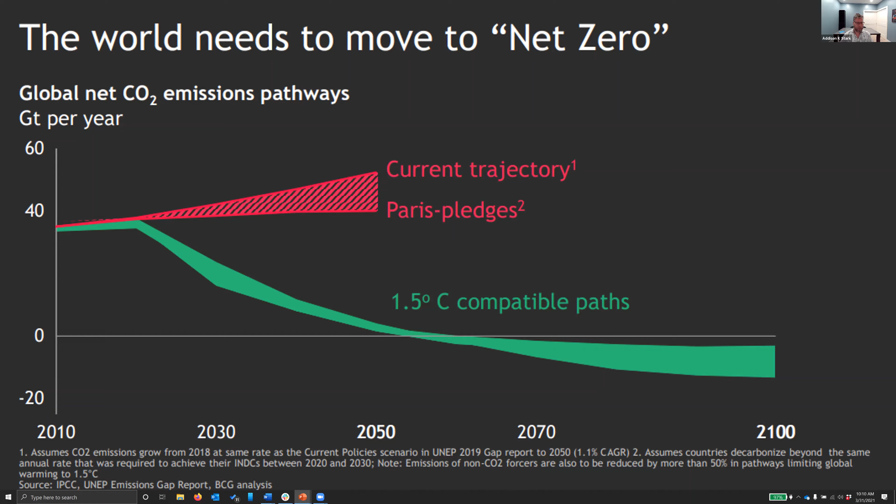But one of the important pieces is the fact that all the sectors not only need to be able to get to net zero, but eventually go to net negative. So that means a broad innovation agenda to be able to develop the technologies we need across all emitting sectors. And today, if you look across where are emissions coming from, you can track them to primary energy consumption.

So if you look at this classic Sankey diagram, which I'm assuming every week this has come up during this seminar series, things are kind of equally spread across electricity generation for residential, commercial, and industrial use, but also, as you notice, a huge amount of fossil energy between petroleum, natural gas, and coal is used directly in industry. Some of that's used as feedstock to be able to make materials, but the vast majority of it is used to directly produce heat to drive processes.

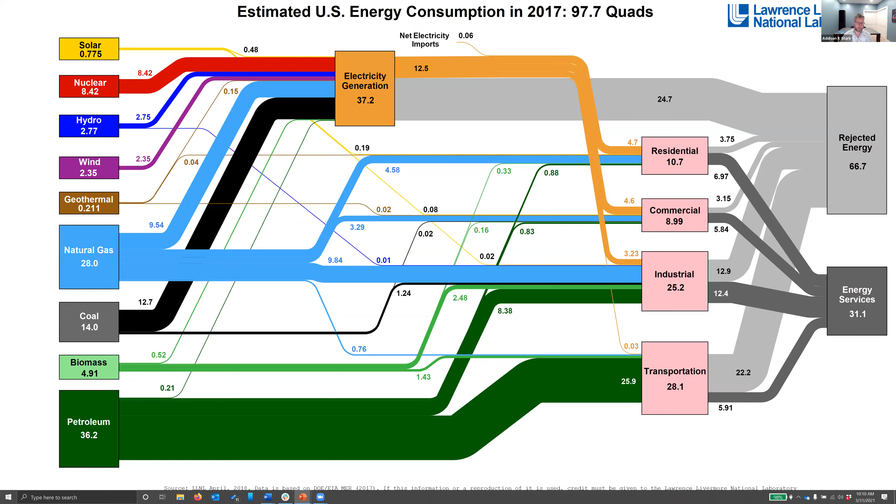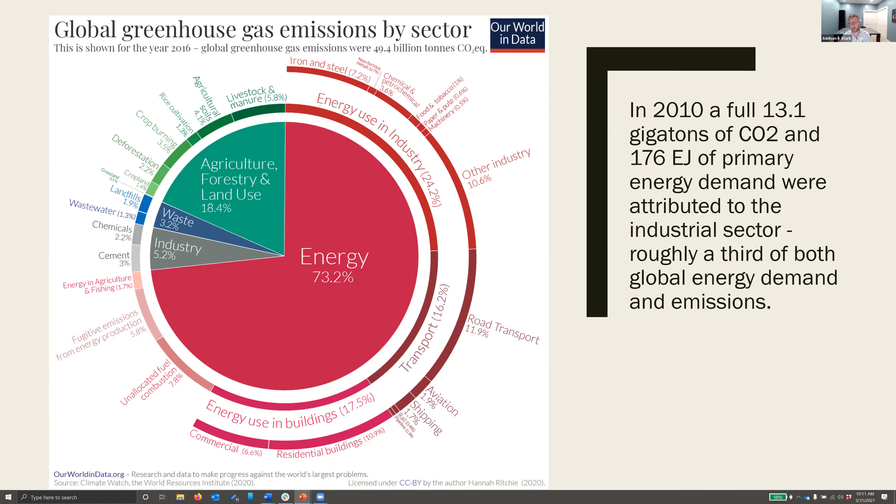When you drill down a little bit, you can see that in 2010, a full 13.1 gigatons of CO2 and 176 exajoules of primary energy demand were attributed to the industrial sector, which is roughly a third of energy use and an equivalent amount of CO2 emissions. If you want to think about how we actually try to decarbonize that sector, it becomes harder much more quickly.

If you take a more detailed view of this, and actually it looks like my toolbar might be blocking this, I apologize, but this is from a great website called departmentof.energy, where you can actually drill down and look at each of the individual parts of the industrial sector.

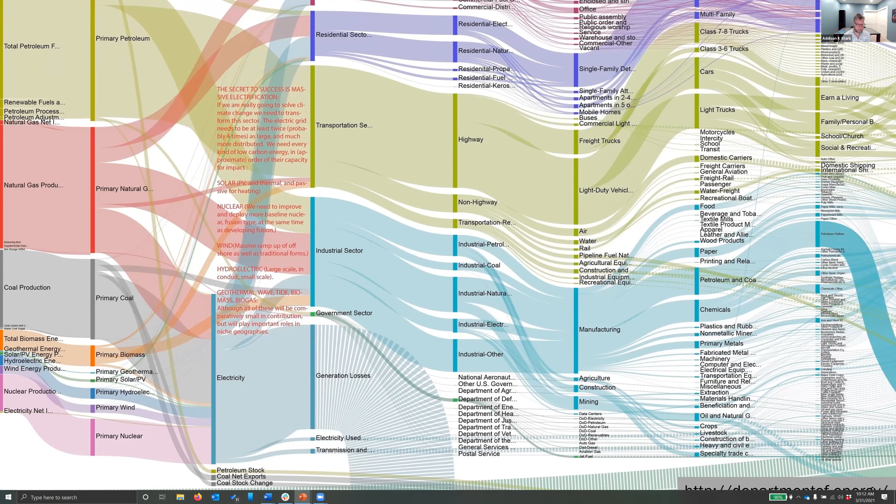You'll see that actually to decarbonize the industrial sector means you need to start to address hundreds, if not thousands, of individual processes. So innovating and developing, for example, a new process to smelt nickel would be very expensive. And can you port over knowledge you learn from decarbonizing other technologies? We run into the challenge that industry is a collection of very inhomogeneous processes. So how do we find unifying opportunities to start to decarbonize this sector?

One thing we need to recognize is that some of these industrial emissions are inherent to their process chemistry. So if you look at the production of cement and steel, the materials that build our world around us, each of these do have process heat associated with them, but they also have direct emissions of CO2 from their process chemistry. This is something that Fon talks about a lot in his work and focuses on how do we think about re-innovating these processes to make them more decarbonized in their process chemistry itself.

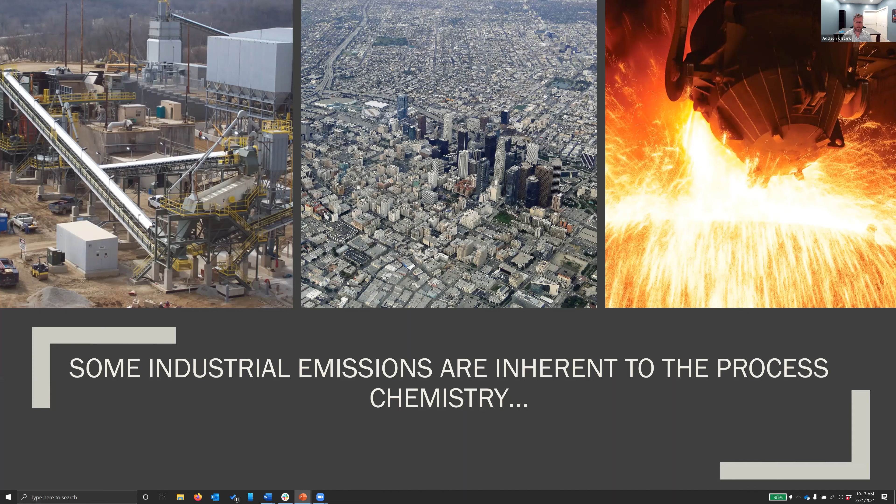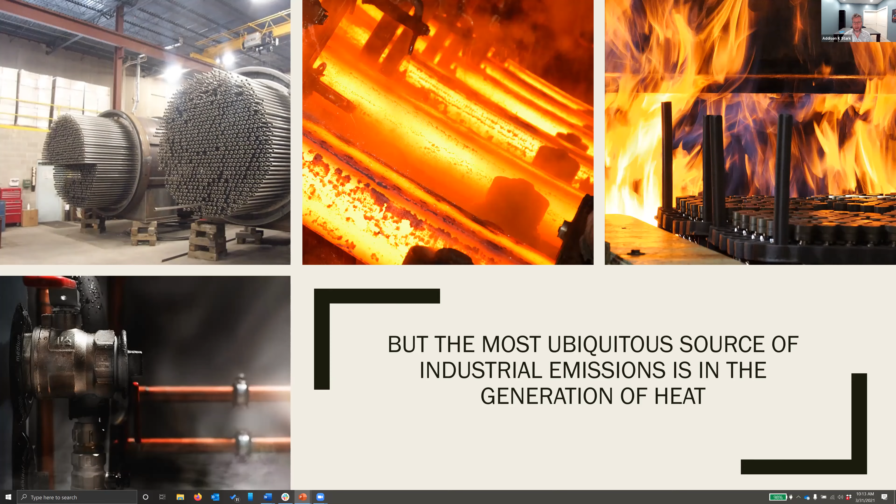However, the most ubiquitous source of industrial emissions across all the different processes that we see in industry today is through the generation of heat, whether it be through steam to drive machines or to do process conversions to drive chemistry. You can imagine steam being used for disinfecting or cooking in food processing, or the very high temperatures necessary to process metals, or furnaces to drive other material processes. So it's a burning problem.

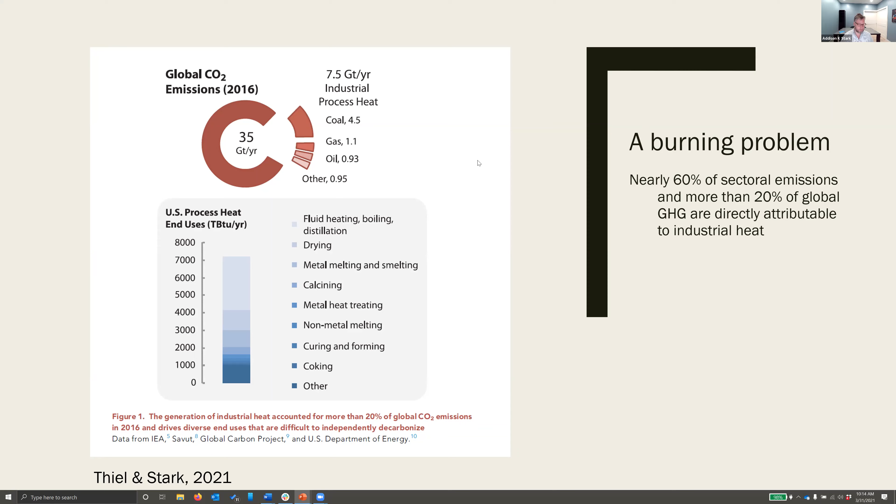Nearly 60% of industrial sectoral emissions, and more than 20% of global greenhouse gas are directly attributable to industrial heat, which means this is a huge challenge, but also it's a huge opportunity. You can go after 1/5 of global emissions by thinking about how you decarbonize the heat used in industry. And as we noticed before, most of these are driven by fossil fuels that are directly combusted to drive these industrial processes. But there's not a one-size-fits-all solution.

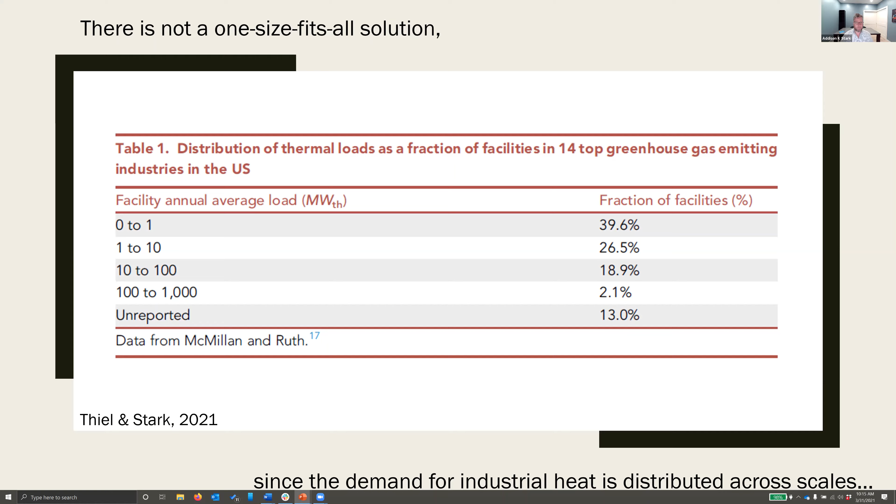And it's not the same as the challenge of decarbonizing electricity, where you're talking about very large 1,000 megawatt loads that you're replacing and decarbonizing. You have a much more distributed challenge. But also it's distributed across temperature scales.

In industry, the demand for heat spans from low and mid and high pressure steam that brings you up to about 250 C. But then you have very high temperature demands up in excess of 1,000 Celsius to be able to drive metallurgical processes, chemical processes. And so you have this challenge of we need to be able to develop technologies across scales and temperatures. And so this is the challenge that we need to bridge.

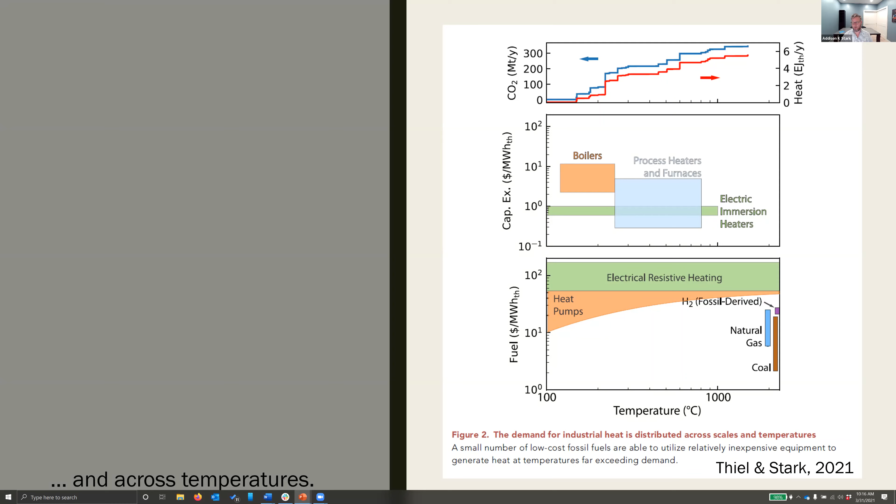And we need to not only develop the technologies, but we need to deploy them. And that's the important question of how we design our policies to be able to drive and address this challenge.

The way that we framed things up in our recent paper was focusing on breaking down and thinking about how you leverage existing approaches, and thinking about how do you actually decarbonize this is focusing on zero carbon fuels, zero carbon heat like solar thermal, geothermal, or leveraging the fact that the electric sector is decarbonizing in parallel. So as that decarbonizes, how much of industrial heat can we electrify?

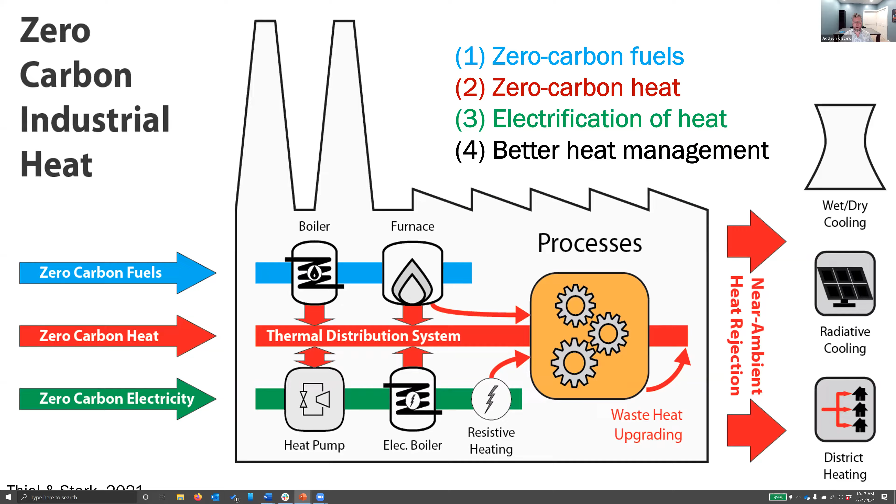This has traditionally been a gap that has been more and more addressed by the development of policy solutions by creating applied research organizations that are generally federally funded. This is an area where often we run into a challenge of also being able to transition to bringing it to the private sector. So being able to support private sector companies to take on risks in this area, but also later stage challenges.

Obviously, you should turn to Asegun Henry's paper that was the subject of the first of these colloquia series a year ago, thinking about the broader innovation challenges. But for those that are interested in thinking about how we actually develop policies to be able to deploy decarbonization in global industry, I'd recommend people take a look at this. So this balances the technology opportunities, but also the policies.

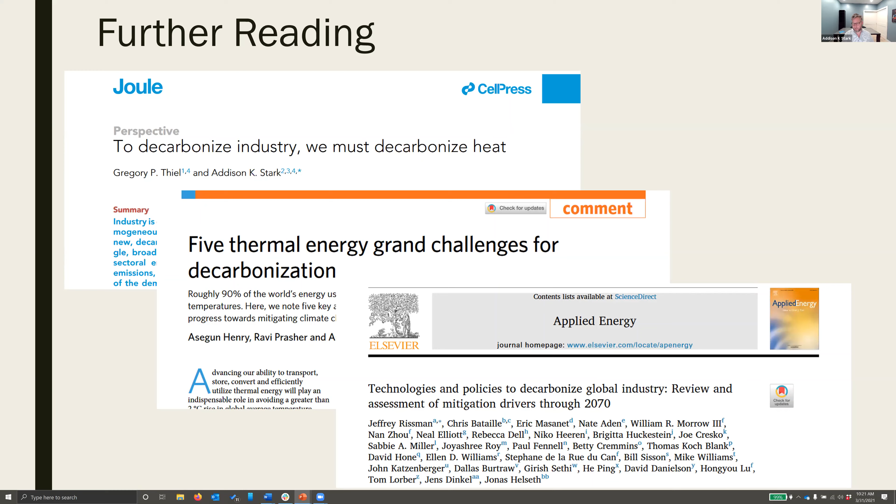And so with that, I'm going to go ahead and turn to my colleague, Colin Cunliff. I'm going to stop sharing and hand off to him to go ahead and bring us a little bit more of a framework of how innovation policies support the development of these technologies.

Thanks, Addison. I really appreciate your talk, and it was very comprehensive. So that actually makes my job a lot easier. I'm going to share my screen now. Whoops, that's the beginning. Or that's the end.

Okay, so thanks again for inviting me to speak. The focus of my talk will be innovation needs and policy options for industrial decarbonization. As Addison mentioned, I'm also on the National Academies Committee for Accelerating Decarbonization of the U.S. Energy System. And we released a report about a month ago that identifies technology and policy needs to achieve net zero by mid-century. So this is a figure from the report that displays, in particular, research, development, and demonstration investment needs for the industrial sector, arranged across 4 key technology pillars.

And you see a lot of overlap with some of the technologies that Addison mentioned: carbon capture, use, and storage, low carbon fuels, electrification, and energy efficiency. And it's important to pursue all of these pillars in parallel. This figure also arranges our RD&D needs according to time frame. So what we need to do in the 2020s, the 2030s, and the 2040s. And this is meant to encompass the entire set of industrial emissions.

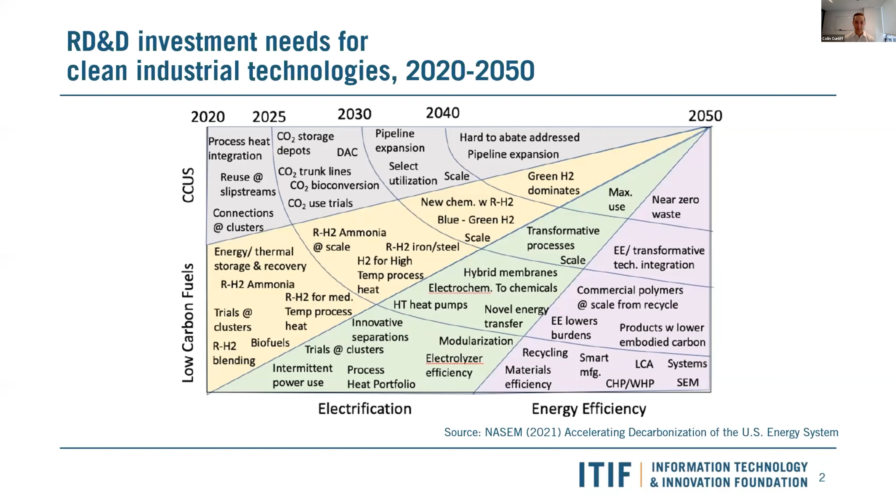The International Energy Agency has produced something similar in their sustainable development scenario. And this figure shows the time to early adoption for key industrial technologies. Most of them we need to mature in the mid 2030s, gas DRI with CCUS around 2040. But I should point out that the sustainable development scenario is consistent with 2 degrees of warming and reaches net zero emissions by 2070. So the IEA is now in the process of developing a scenario that is consistent with 1.5 degrees of warming that is designed to achieve net zero global emissions around 2050. And I suspect that this moves up the time frame in which these technologies are required to mature.

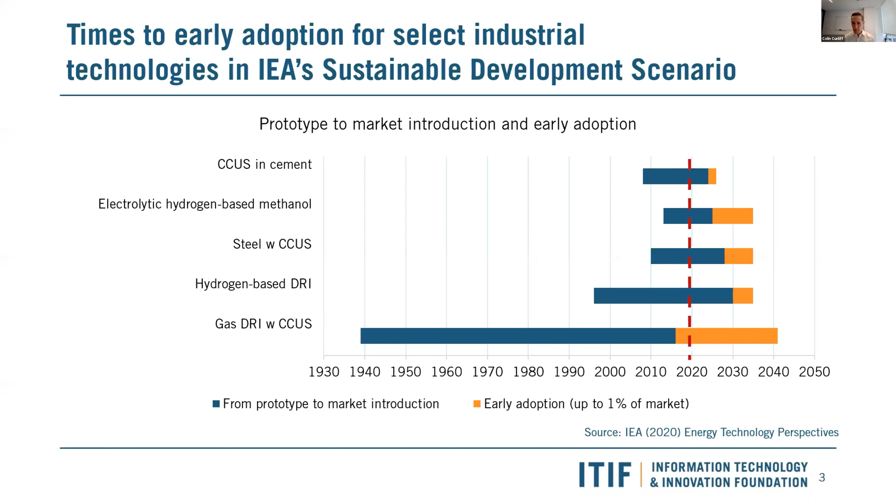So how do you do that? What's the role of policy at accelerating innovation in industrial decarbonization, in thermal decarbonization? Well, one of the easiest ways that comes to mind is just invest in research, development, and demonstration funding. And that's certainly an important component. I do think it's important that we think more broadly about what innovation is. So this is a quote from the National Academies that it's so beautifully written, I just want to read directly.

Over the past decades, the United States has seen precipitous cost declines in 4 key technologies. And in each case, these trends were influenced by similar processes involving both proactive public investment in research, development, and demonstration, and the creation of markets to hasten early adoption and ignite private sector innovation and competition. So the point is we need both the technology push, but also demand pull. We need markets that are pulling these technologies to market.

Now, my focus has been mostly on the RD&D side, so that's what I will talk about the most. But I just want to acknowledge that innovation is broader and really works best when we have a complete set of policies working in tandem. The committee did note 2 particular gaps in the US innovation system. First is scale up. How do we scale up technologies from the lab setting to commercial or near commercial scale? This is sometimes called the demonstration gap. And the US has virtually stopped funding demonstration projects after the American Recovery and Reinvestment Act of 2009.

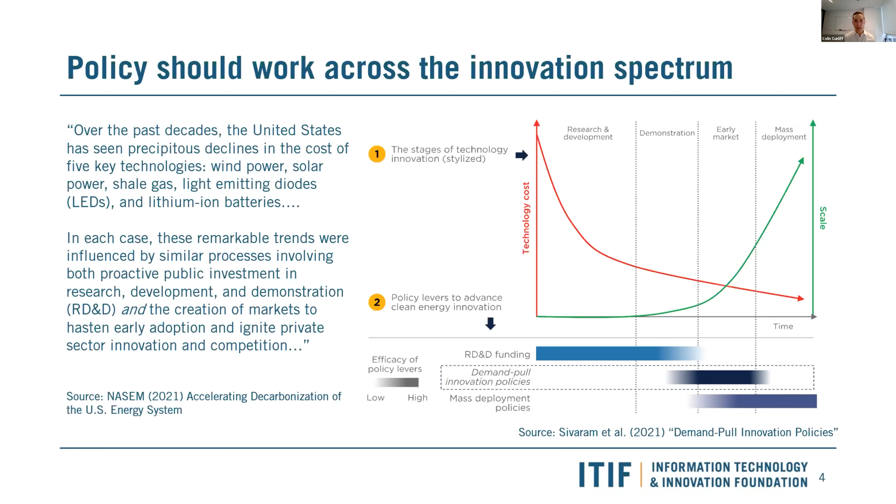So I'm going to talk about the RD&D portfolio first. Much of the effort over the past few years has focused on expanding RD&D in industrial technologies, and there's a good reason for that. The industrial sector accounts for 22% of direct US greenhouse gas emissions, but only 6% of DOE's energy RD&D portfolio. Most of it is in clean electricity generation or the grid, a quarter in science and

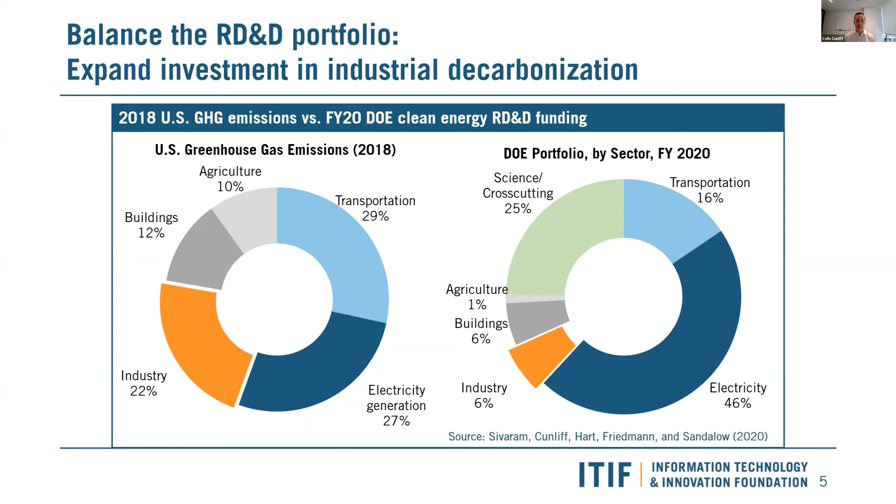cross-cutting technologies, but a very small chunk at the Advanced Manufacturing Office. That primarily focuses on energy and materials efficiency within manufacturing. So as we scale up RD&D, Congress should target these under-resourced sectors like the industrial sector for the largest increases. Now, the good news is Congress is listening, and that's actually what has happened. So there's been broad bipartisan support for an expansion of industrial decarbonization RD&D.

This graph shows funding for the Advanced Manufacturing Office broken down into sub-programs. R&D consortia includes things like the Manufacturing USA Institutes, the Manufacturing Demonstration Facilities, R&D projects. AMO also provides technical assistance in gray. All 3 sub-programs have grown over the last 5 years. In Energizing America, which is a book that I co-authored last year, we recommended that Congress increase AMO's budget to nearly $900 million in fiscal year 2026.

A big change just recently is the Energy Act of 2020, which was passed in December. It provides the first reauthorization of DOE's programs in more than a decade. Now, it does not include reauthorization of the Advanced Manufacturing Office; that was just left out at the end. Congress couldn't get it done. That is something they're looking at this session. But it does include several exciting new provisions for industrial emissions.

First is it establishes a new industrial emissions reduction technology program at DOE. This is the green line on the graph. This focuses explicitly on industrial decarbonization. So AMO, as I mentioned, is mostly focused on efficiency. This would broaden that mandate to look at deep decarbonization. Now, we don't yet know how DOE will organize this program and whether it will be, for example, a new sub-program within the Advanced Manufacturing Office or something completely separate. I suspect we'll find out more in the coming days as the budget is rolled out.

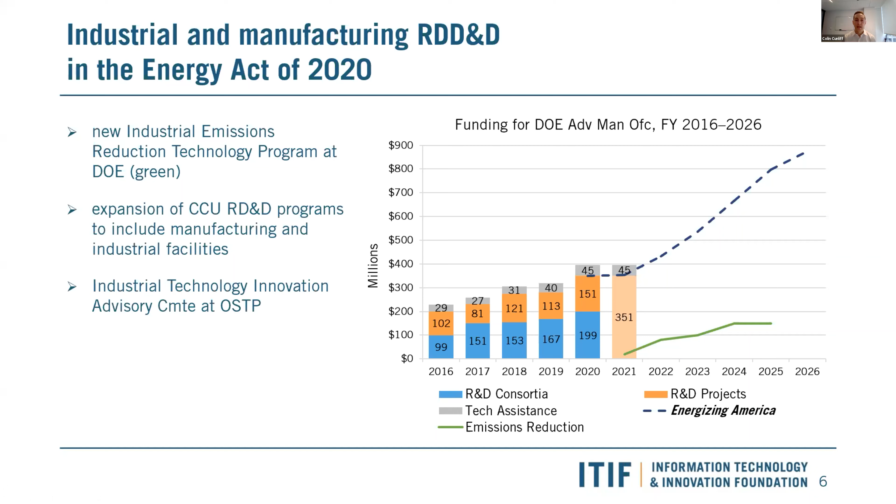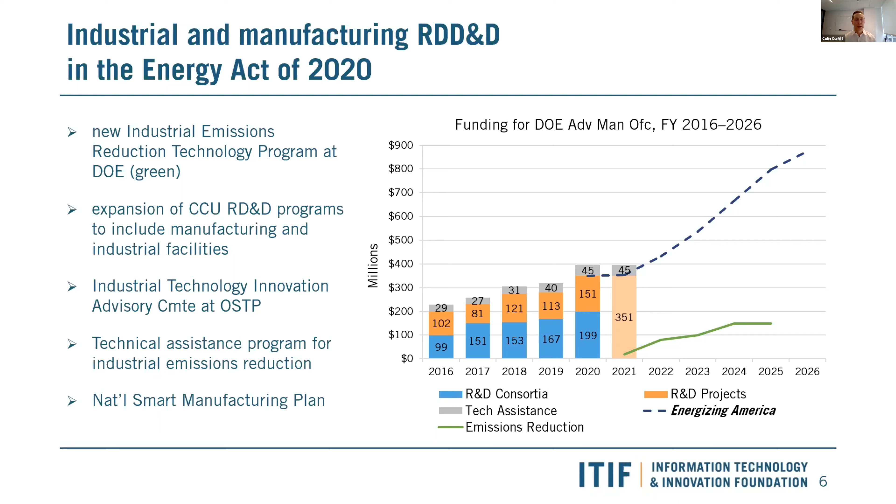It also establishes an Industrial Technology Innovation Advisory Committee at the Office of Science and Technology Policy. It creates a technical assistance program for industrial emissions reductions. Now, I should say it creates a technical assistance program, but does not authorize funding. So it's kind of just a shell program. We'll have to see what comes of this. It also calls for a national smart manufacturing plan.

Coming soon in the near term are these industrial decarbonization roadmaps. So in the Omnibus Appropriations Act of fiscal year 2020, Congress directed DOE to create these industrial decarbonization roadmaps, building off previous studies such as, some of you may be familiar with, the energy bandwidth studies, which focus mostly on improving energy efficiency of different sectors. So this is a broader focus again on deep decarbonization.

DOE hosted several workshops last summer to solicit information and inform the development of these roadmaps. They should be coming out in the next month or so. My understanding is that they're complete. They're just going under review. But these roadmaps will really inform future research directions at AMO. And you can see they picked 5 key industrial sectors that account for more than half of industrial emissions. This is refining, chemicals and plastics, iron and steel, food products, and cement.

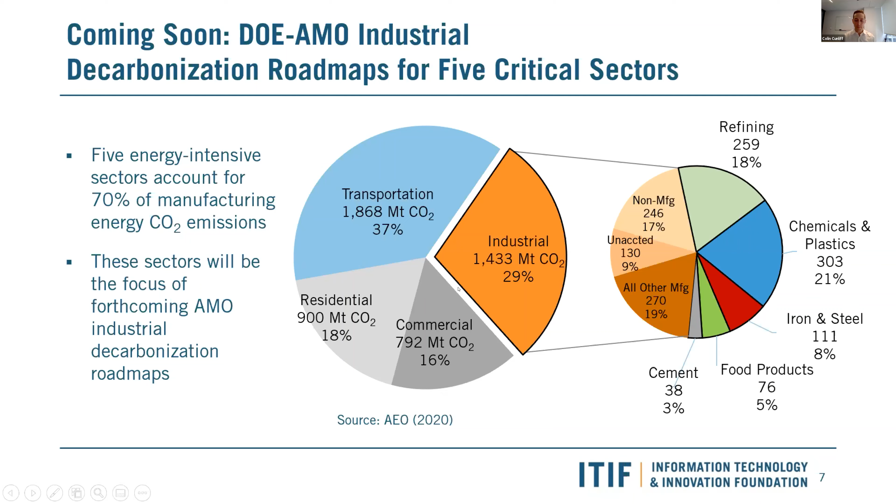And then policy developments to be on the lookout for in this coming legislative session. I've broken it out by R&D, demonstration, and early deployment. First, in R&D, the Department of Energy will have to see how they implement some of the new provisions of the Energy Act. Are they going to establish this new industrial emissions reduction technology program as a cross-cutting program? Will it be housed within AMO? DOE has also joined the Undersecretary for Science with the Undersecretary for Energy to hopefully get better coordination between the DOE Office of Science, which funds basic research, and the Applied Energy offices.

Then I'm also interested in this topic of technology targets, which can really help frame and provide direction to an R&D program. The SunShot targets for solar photovoltaics is a great example. DOE really doesn't have any targets for industrial decarbonization or for thermal heating. So I'm interested in whether DOE should maybe set a $1 per kilogram target for hydrogen production or targets for hydrogen use in thermal process heating.

Congress is going to revisit some of these provisions that were left out of the Energy Act, including reauthorization of AMO, but also the Hydrogen and Fuel Cell Technologies Office. And there's a big opportunity in hydrogen and fuel cell technologies that is primarily focused on transportation sector applications. But we could perhaps broaden that to industrial applications of hydrogen.

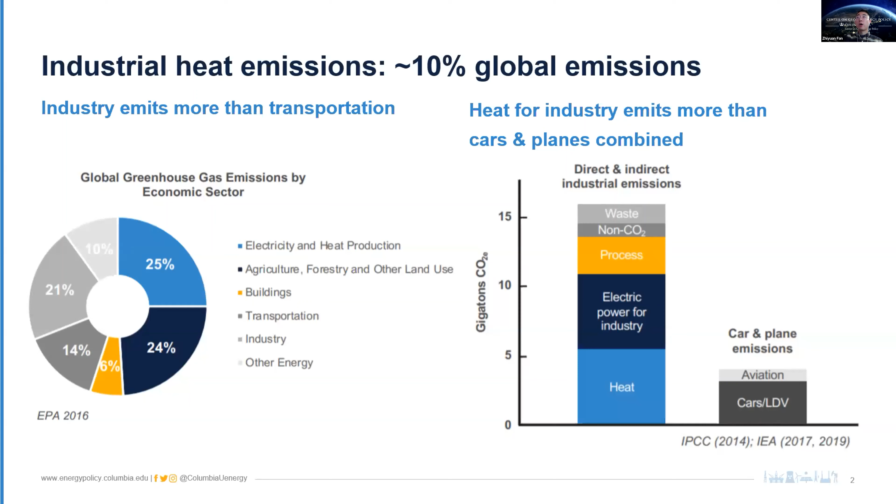So if you believe sustainable aviation fuel is important, decarbonization of automobiles with electric vehicles is going to make a very impactful case and also going to be a very big market and opportunity. So does industrial heat. This is really the sector we need to focus on in the future because it's really huge, it's really challenging, and there are lots of opportunities in there as well.

So we're going to review what sources are actually available today to provide low carbon heat to replace the old fossil heat. The unfortunate news is that there are not a lot of options, because there are a lot of requirements for heat to be qualified for industrial heating. The first one is high quality, high temperature.

As Edison introduced, there's a wide range of temperature requirements. Some of them are relatively low temperature. For example, the paper and pulp industry requires a temperature of roughly 200 degrees Celsius. Some chemical production, such as ammonia, methanol, and some hydrogen production from steam methane reforming, will require a temperature from 400 degrees Celsius to 800 degrees Celsius.

But some of the heavy industry really requires a super high temperature, higher than 100 and higher than 1,000 degrees Celsius. For steel, the blast furnace is at 1,200. For cement, the clinker kiln is 1,400. For glass and ceramics, the furnace is 1,600 degrees Celsius. So there's a really high temperature requirement, and that really limits a lot of the technical availability for providing this low carbon heat.

The heat sources that we did analysis on that are suitable to provide this low carbon heat and satisfy the requirements are hydrogen, electricity, and biomass. For some of the relatively low temperature requirements, such as chemical production and the paper and pulp industry, maybe nuclear heat can be applied as well. But today, most of the nuclear heat is in the form of steam with roughly 300 degrees Celsius temperature. Hopefully in the future, fourth generation advanced nuclear reactor technology can provide a much higher temperature range.

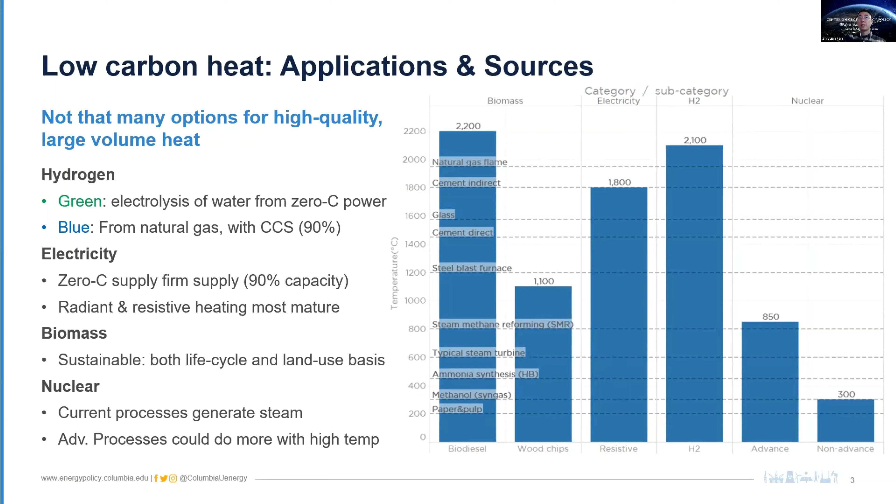But the short message is we don't have a lot of options, and in order to be used as industrial heat supply, you really need to have very high temperature, large volume, and high quality. That is challenge number one. Challenge number two is really the cost. Even if we have those technical challenges solved, we have the equipment available, we have the money we really need to build up the plant, the cost for the heat itself is really a big challenge.

We did analysis with a wide range of different options, basically all the options we just mentioned. They're showing a wide range of costs as well, but all of them are going to be very, very expensive. We're comparing them with the current baseline, using natural gas as our comparison. Today, the typical natural gas price in the United States is roughly $2.5 to $3 per MMBTU. For other countries that require import of natural gas in the form of LNG, the natural gas price is going to be much higher, from $6 to $8 per MMBTU.

But even comparing with the LNG price, most of the low carbon heat sources today are still much more expensive, 2 times, 5 times, or even 10 times more expensive. Just to give people a comparison of what the $3.5 per MMBTU natural gas price means in terms of other heat sources: it means a $0.4 per kilogram hydrogen price. Well, today's hydrogen production cost is 1.2 to 1.5, and it's not clean hydrogen, it's dirty hydrogen.

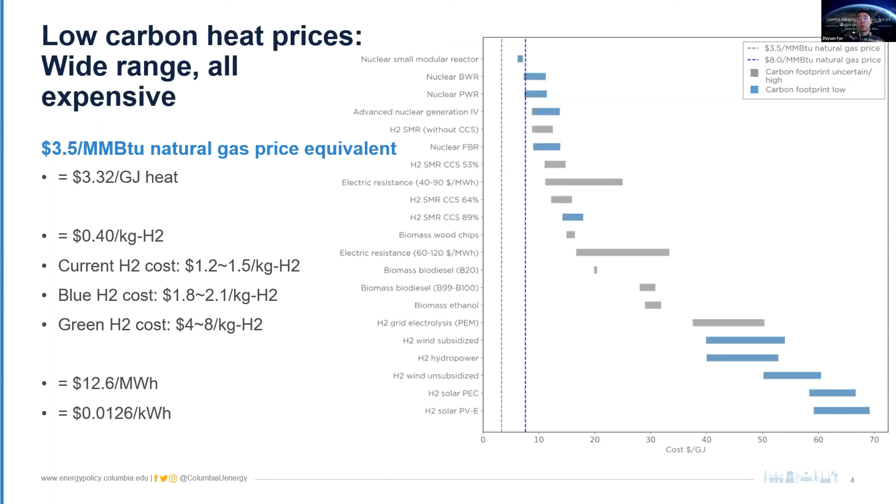And the third challenge is really the balance between the different dimensions of providing the low carbon heat options. The 3 dimensions are the carbon footprint, technical feasibility, and the costs. Today, we have some low cost options as we discussed, but they typically have a low technical feasibility. For example, nuclear heat and some electricity heat can provide the low cost options. You need to solve the technical feasibility to make sure that the nuclear steam and electricity can actually be used for industrial processes.

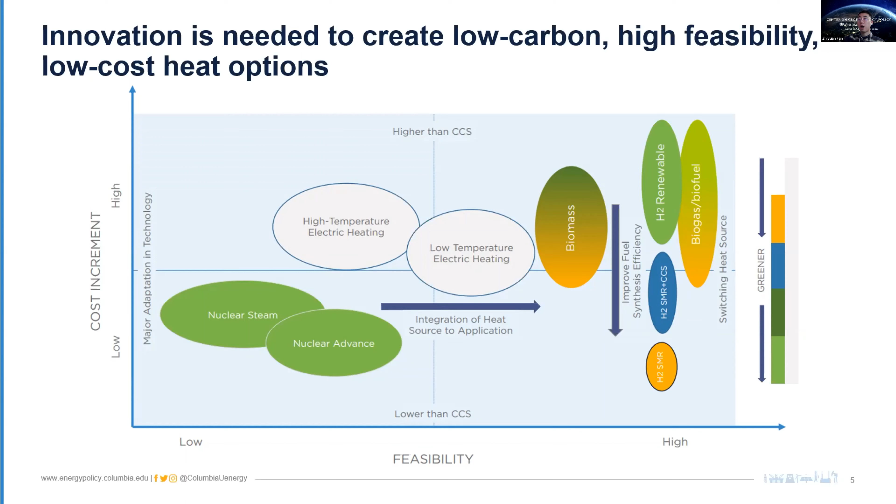Some of them have high technical feasibility, basically the alternative fuels using biofuel, hydrogen, or solid biomass, but they're very, very expensive. If they're not expensive, typically they have a high carbon footprint, so you are not getting any carbon credit by doing this alternative fuel switching. So balancing the 3 dimensions, carbon footprint, technical feasibility, and cost, really should be the focus of any innovation and any policy to address this challenge.

Here we're going to use an additional example from the iron and steel industry as a demonstration of how hard it is. As we discussed, most of the options can play a role in decarbonization of the iron and steel industry: hydrogen, biomass, electricity, and there's always something you can do with CCUS, although it's not an innovation in terms of low carbon heat, but CCUS is always a second option.

A lot of them have challenges, either cost challenges, carbon footprint challenges for biomass, or technical feasibility for zero carbon electricity to fit into the system. And the biggest challenge of all of them is the decarbonization potential. None of the options we just mentioned can deliver deep decarbonization alone.

Some of them can deliver a decarbonization potential of about 60%, so it can resolve 60% of the carbon emission from the iron steel industry. Some of them are only 10 or 20%. So if we really want to move to net zero, we need more options. Today's production fleet of the iron steel industry using blast furnaces is really not capable of moving to deep decarbonization and eventually net zero. So we need innovation.

For example, molten oxide electrolyzers use electricity only to produce iron steel, or we can use a combination approach. So instead of using hydrogen or biomass alone, we can use them together, coupled with CCUS retrofit, so we can deliver deep decarbonization. And particularly CCUS, although it's not a low carbon heat solution, is proved to be very, very important because it can provide roughly 50% decarbonization potential, capable of working together with biomass and hydrogen

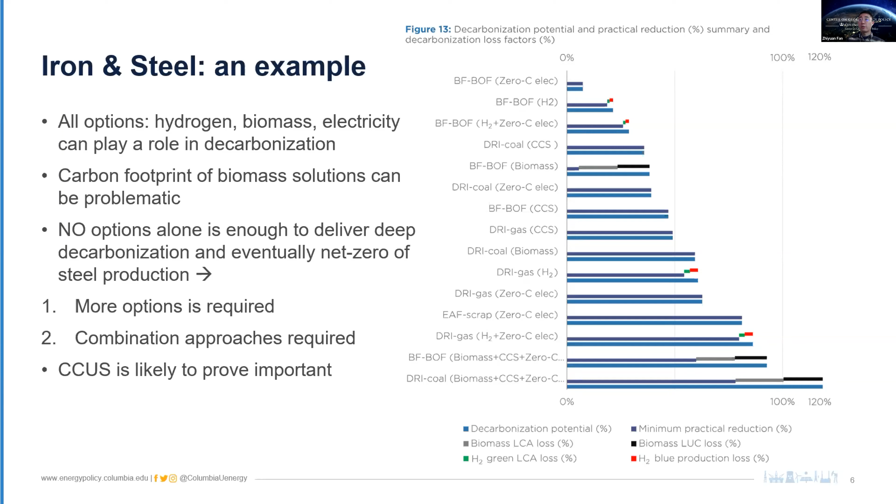to deliver even deeper decarbonization. And most importantly, it is one of the cheapest options in terms of dollars per ton of CO2. Among all the analysis we did, all the options we analyzed, CCUS is definitely one of the cheapest options to apply directly to the iron steel industry.

Other low-cost options include zero carbon electricity feeding into the system. It's not exactly very cheap. It's still higher than $100 per ton of CO2 carbon abatement cost, but it's moderate compared with other options. The combination options really take an average between the different options, so it's not that expensive. Today, green hydrogen is very expensive, and non-ideal biomass is very expensive.

Finally, we may move on to the policy implications. It's going to be very hard to decarbonize the whole industrial sector and for low carbon heat as well, but it's very important. Traditionally, we can use a lot of policies to resolve some of the problems and accelerate this transition, but some of the conventional policies have very limited value.

For example, we want to do the low cost options first. That means zero carbon electricity or CCS retrofit, but that needs infrastructure support, either transmission lines for zero carbon power or CCS pipelines to transport CO2. Those infrastructures simply do not exist today. And that means we need to pay a very high upfront cost to build the infrastructure, and that will take time and that will take money. Very fortunately, we're seeing this infrastructure bill coming today with multiple $1 trillion, and hopefully this particular issue can be addressed in the next few years.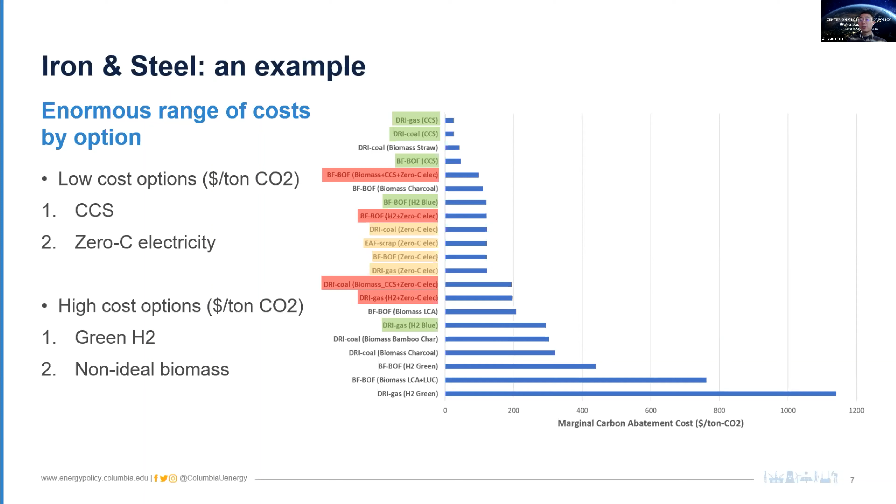Secondly, people talk about carbon pricing proposals to try to accelerate the deployment of low carbon technologies. But heavy industry is especially not sensitive to any carbon pricing proposals because heavy industry has a very high abatement cost. As we mentioned before, for the iron steel industry, the carbon abatement cost is very likely higher than $100, some even higher than $200 per ton of CO2, while typical carbon pricing proposals have a carbon price from $20 to $60 or $80 per ton of CO2.

So paying the carbon tax is really cheaper than doing any actual abatement by using hydrogen or biomass. So instead of doing actual abatement, the plants and manufacturers are really going to just pay the carbon tax or simply shut down the plants and move somewhere else. Similarly, if we want to do a border tariff to protect local clean production, the border tariff is also going to be very high, similar to the carbon pricing proposals.

As we mentioned for the iron steel industry, the existing fleet is not capable of any deep decarbonization, even with the heat solutions. So we really need to consider an asset replacement strategy to replace the current fleet with new technologies capable of bringing in low carbon heat or low carbon solutions. This is where policy can actually help a lot. Government can set up a replacement grant inside the infrastructure bill to pay for such asset replacement so we can accelerate this transition.

As Addison and Colin also mentioned, we can do government procurement to make sure that low carbon products get purchased first, since government is always the largest consumer of these industrial goods. We also need to provide special incentives for early adopters, since a lot of technology is immature; it requires a lot of research focus, a lot of deployment, a lot of development.

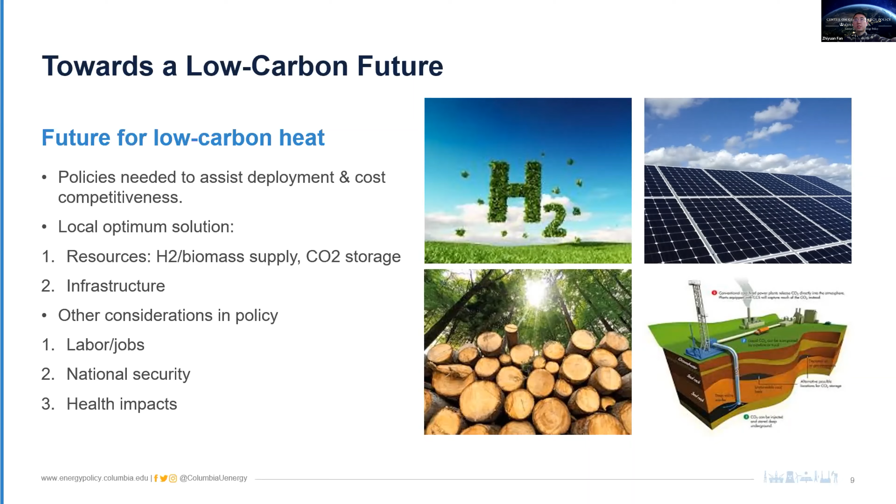Thank you, Fan. That was very informative and also nice to see a couple of examples of specific processes.

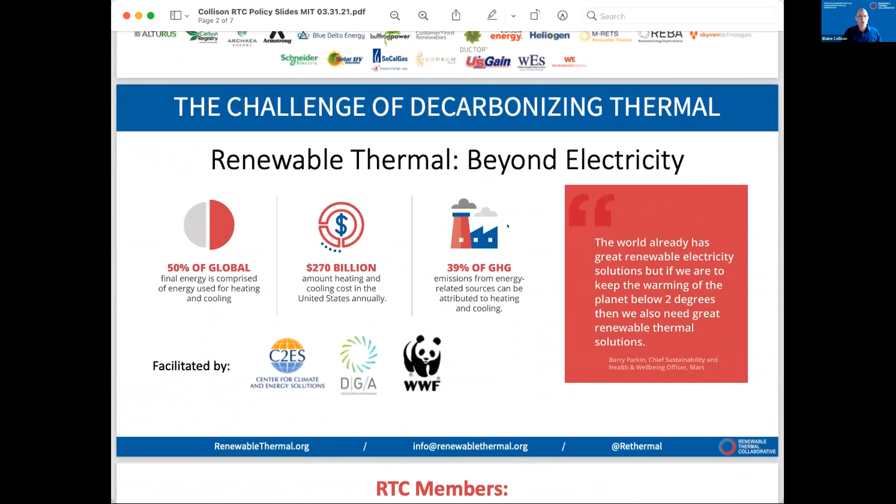From a high level here, I guess 2 things. If you're at the outset of your career and you're trying to think about what you should work on that would provide long-term employment certainty, working on decarbonizing thermal seems like a pretty safe bet, because we are in no danger of resolving this in the next 10 minutes or even, say, 15 years, unfortunately. So dig in.

It's a huge job, I think we've established here so far. It is a gargantuan challenge, the complications are staggering on any number of levels, and it's urgent, right? I mean, the clock is running, and it's running fast and hard, and the things that need to happen here have to happen, right?

So the RTC, as I said, I'm sort of coming from the bottom up, and let me contextualize that. The Renewable Thermal Collaborative is a membership initiative. It's co-convened by the World Wildlife Fund, the Center for Climate and Energy Solutions, and David Gardiner and Associates, where I work. So 2 NGOs and a boutique clean energy consulting firm, and we exist because 4 years

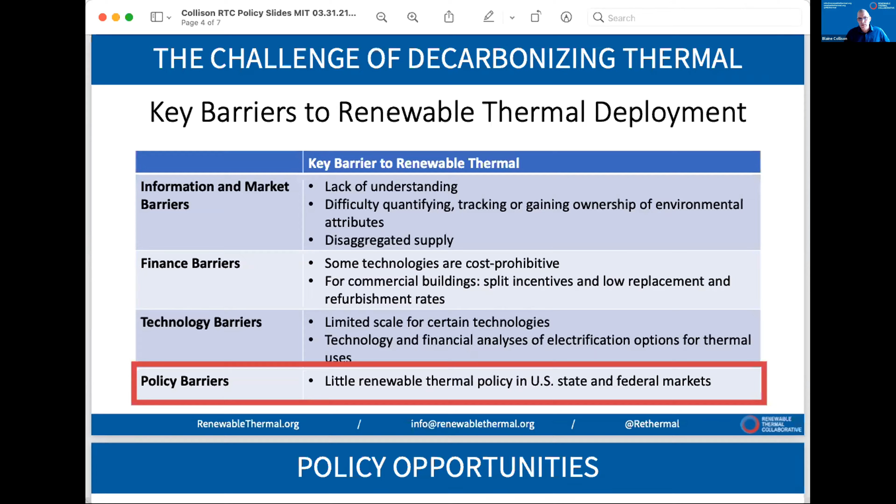They're all looking to get started, and there is a broad recognition that policy is a hugely important lever here, right? Both at the big levels that Colin and Fan particularly were describing, right? All kinds of federal resources to be deployed, RD&D agendas, right? Fundamental technology stuff. But there's some other dimensions to policy, right? And I'm just going to tease the fact that the RTC has just put out a policy report. It's available for download on our website.

And here's the high level conclusion: policy has been dramatically underutilized, right? And I will also share that water is wet, right? But we have not had a lot of policy attention on thermal and on decarbonizing thermal and on renewable thermal. And so this report takes 100 pages to really stretch that out and to have a look at some of the policies that do exist in places, particularly in Europe. Some of the policies here that are in place at the federal and the state levels, and then some of what's being proposed, right? And, Colin particularly noted, there's actually a lot going on, right? There's a moment here where a lot of attention is focused on the policy possibilities here in Washington.

And I'm sure by the end of our call today, Colin will have dug through the new infrastructure bill and can tell us what's in there. I mean, one of the things I would point out about policy, and this is true broadly of the RTC's view on technology also, is that this is very much a yes-and kind of conversation and kind of opportunity, right? There is no one single true policy solution here. Just as there's no one single true technology solution, right?

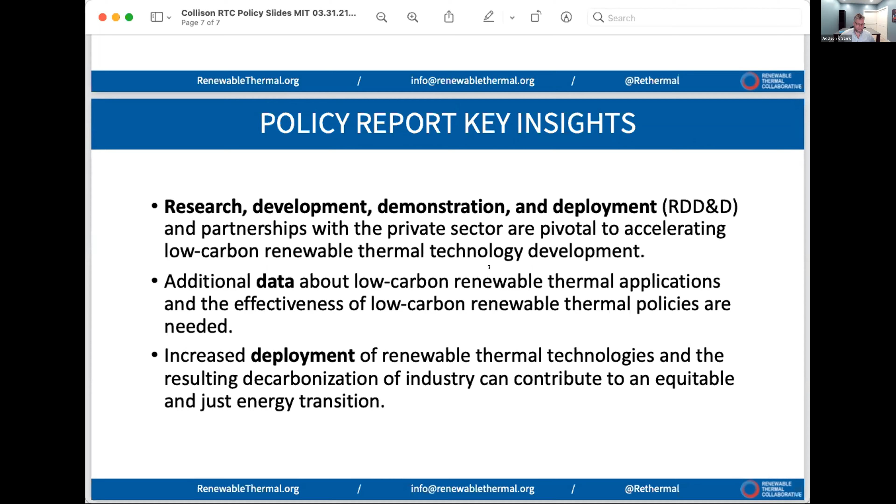Blaine, thank you very much. I think a lot of these insights are very important, and I want to pull this thread with the panel a little bit. It seems like when you created the Renewable Thermal Collaborative, it's the idea of building off of things that were done in the renewable electricity sector, this idea that people can go out and procure decarbonized electricity for their processes as buyers. However, it seems like there's a challenge here, and this is reflected in some of the questions coming in: electricity has a dense mesh network across the continent.

You can have markets that connect renewable generators with users thousands of miles away, but heat is so much more localized. And it seems like some of the challenges to designing deployment policy here can't be directly ported over, but it's much more focused on helping to support the building of technology locally, helping individual facilities build. Can you talk a little bit about that? What are the limitations? Maybe that's just my observation, but we can't take the same policy design from electricity here. Yeah, that's right.

There is certainly some adaptation that would have to happen, right? Because heat is a very physical thing. I mean, let's consider a virtual heat PPA kind of thing. What's interesting about that as an analog is that if part of the problem here is the marginal pricing, and that is part of the problem, having renewable thermal RECs, TRECs, and having that kind of virtual market would allow companies that want to help drive the creation of a new, pick it, green hydrogen plant somewhere to participate, and to direct capital and investment into a new project. That's actually a pretty useful model.